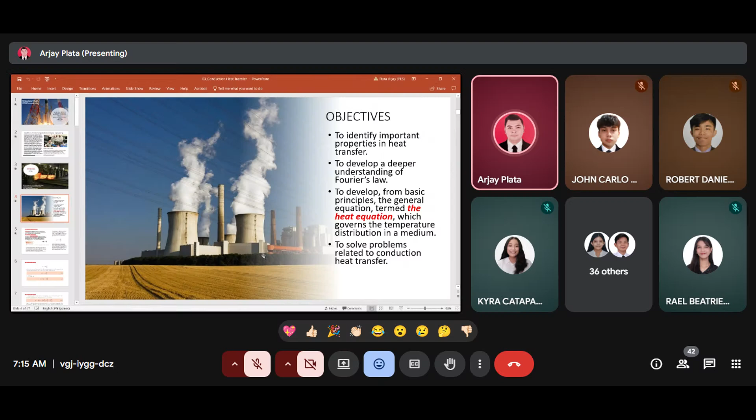So our objective yesterday was first to identify important properties in heat transfer, develop a deeper understanding of Fourier's law, to develop from the basic principles the general equation termed as the heat diffusion equation, which governs the temperature distribution in a medium, and to solve problems related to conduction heat transfer.

So today we will continue our discussion with solving problems related to conduction heat transfer. So this will be our goal for today.

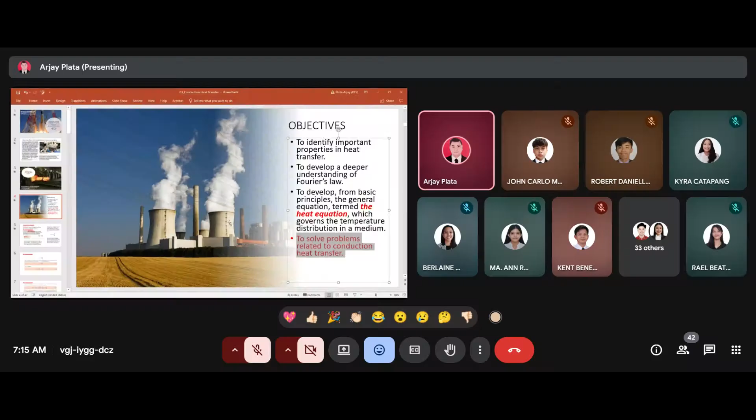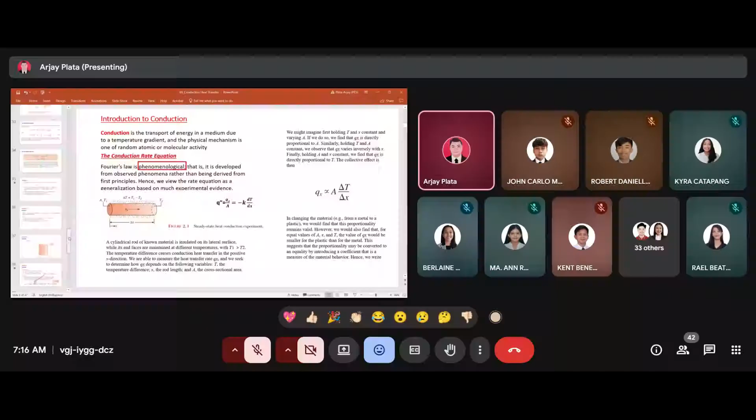So we have discussed the introduction to conduction. The heat diffusion equation was also derived yesterday, so we already know how to derive the heat diffusion equation. This is for Cartesian coordinates.

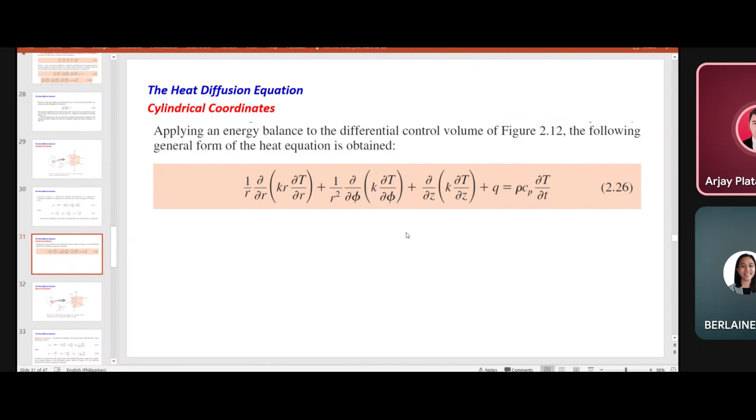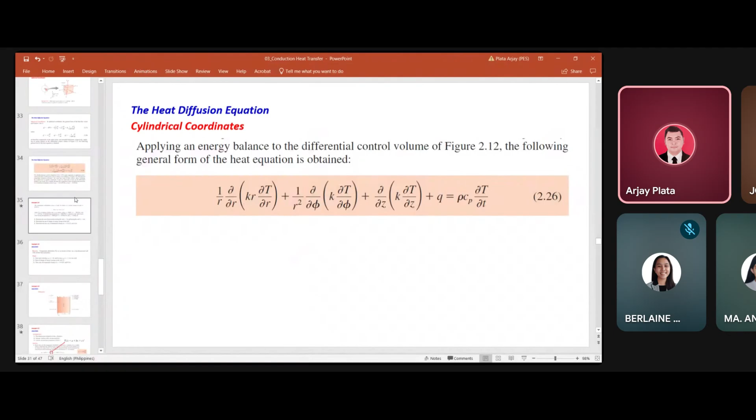For cylindrical coordinates, we have a separate equation similar to equation 2.19 but with different coordinates. So just by applying the energy balance to the differential control volume, we can form the general equation, the heat diffusion equation. And also we have the one for spherical coordinates.

So now you will solve sample problems. Do you have, before we proceed, any question regarding the derivation for the heat diffusion equation?

So for information, we are deriving the heat diffusion equation because the major objective in the conduction analysis is to determine the temperature field in a medium resulting from conditions imposed on its boundaries. So that is the temperature distribution.

So we calculate this so that we can know how to distribute the temperature across a certain system. So the temperature distribution represents how the temperature varies from position in the medium.

So after that, the conduction heat flux at any point in the medium or on its surface may be computed from Fourier's law. So yesterday, we just applied the methodology for energy conservation requirements. So we have identified that energy coming in plus energy generated minus energy coming out is equivalent to energy stored in the system.

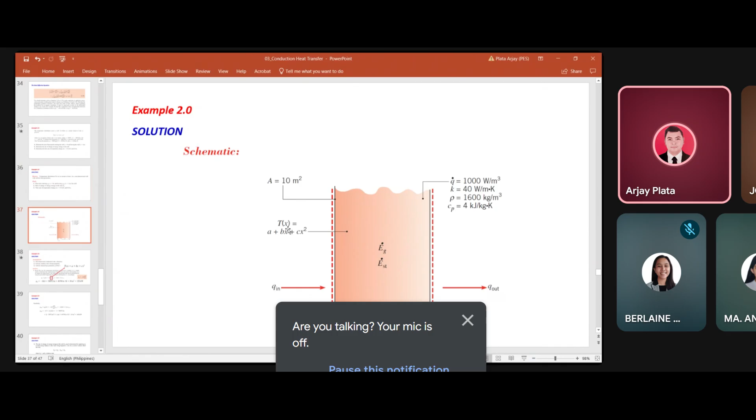Again, ang hinahanap natin ay heat rates entering at Q in at x equals 0. So, yung heat rate, itong Q in at saka Q out, yun yung hinahanap natin given yung equation. So, paano siya isosolve? At saka another hinahanap pa is rate of change yung energy stored. Ito hinahanap energy stored, tsaka time rate of temperature change at x equals 0, 0.25, and 0.5 meters. So yun, yung T yung hinahanap na next. So meron tayong equation. So substitute lang natin yung value ng x dito sa inyo. So naintindihan ba yung problem?

Assumptions natin is always one-dimensional conduction in x direction. So we can add also isotropic medium with constant properties and uniform heat generation Q watt per meter cube, Q dot in watt per meter cube. So uniform yung internal heat generation.

Analysis, recall that once the temperature distribution is known for a medium, it is simple matter to determine the conduction heat transfer rate at any point in the medium or at its surface by using the Fourier's law. Hence, the desired heat rates may be determined by using the prescribed temperature distribution with equation 2.1 accordingly. So, Q in. Okay, so ang hinahanap natin una ay heat rates entering Q or Q in at x equals 0 and leaving at Q out at x equals 1 meter.

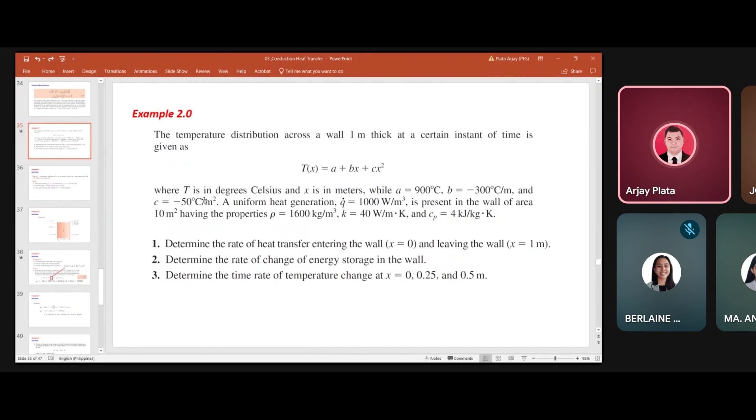So, yun, negative kA, B plus 2Cx at x equals L. So, negative of B plus 2CL, L instead of x, gagawin natin L, times kA. So, equals negative of negative 300 degrees Celsius per meter plus 2 times yung value ng C is negative 50. Given siya sa problem. Ito, negative 50 degrees Celsius per meter squared.

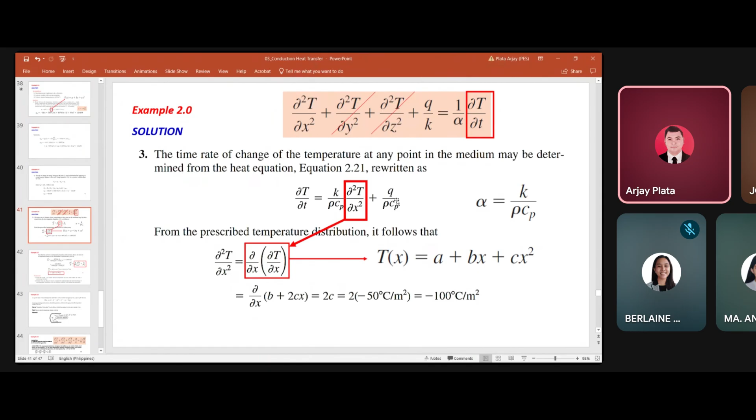So ito pala yung Q generated, Q dot, hindi ko lang nalagyan ng dot. Pero Q dot siya, which is 1,000 watt per cubic meter—ito Q dot to, heat generated. So parehas ang density and Cp, Q over rho Cp, equals negative 6.25 times 10 to the negative 4 degrees Celsius per second plus 1.56 times 10 to the negative 4 degrees Celsius per second. So ito yung magiging time rate of temperature change, na partial derivative of T with respect to time. Ibig sabihin, nagbabago ang temperature at a rate of negative 4.69 times 10 to the negative 4 degrees Celsius per second. Kada 1 second, nagbabago ang temperature ng negative 4.69 times 10 to the negative 4.

From this result, it is evident that the temperature at every point within the wall is decreasing with time. So nagde-decrease yung temperature at every point within the wall. Fourier's law can always be used to compute the conduction heat rate from knowledge of the temperature distribution, even for unsteady conditions with internal heat generation. So applicable pa rin yung Fourier's law sa pag-compute ng conduction heat transfer gamit ang ating knowledge of temperature distribution, kahit meron siyang heat generation. Kaya pala siya unsteady.

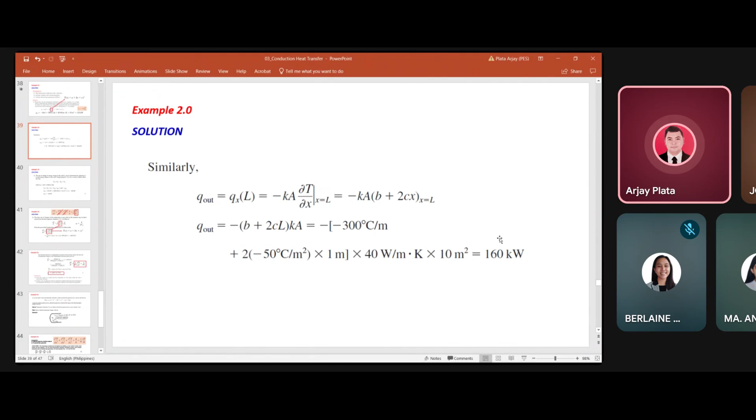Kaya kung mapapansin nyo kanina, yung Qin natin is 120, pero yung naging Q out natin is 160. Ibig sabihin tumaas yung heat transfer na lumabas. Bakit? Paano nangyari na tumaas from 120 naging 160? It is because meron tayong heat generated doon sa system. Pwedeng sa loob ng wall, merong source ng heat, kaya tumaas yung value ng ating heat transfer coming out. Kaya hindi na siya steady state, unsteady state na siya or transient.

May question kayo? Nagets kung paano na-solve yung partial derivative of temperature with respect to time.

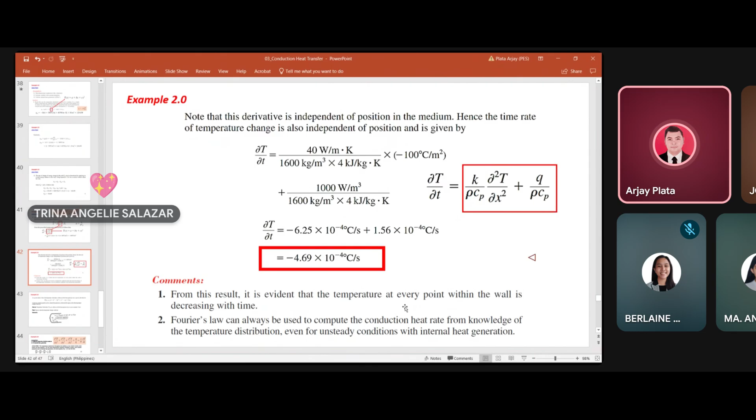Okay, so next example. I will give you 5 minutes to solve this problem.

So, at a given instant of time, the temperature distribution within an infinite homogeneous body is given by the function T of x, y, and z, which is x squared minus 2y squared plus z squared minus xy plus 2yz. I will repeat: at a given instant of time, the temperature distribution within an infinite homogeneous body is given by the function T of x, y, and z. Three-dimensional siya, may x, y, at saka z tayo. So equal siya sa equation na to, x squared minus 2y squared plus z squared minus xy plus 2yz. Assuming constant properties and walang internal heat generation.

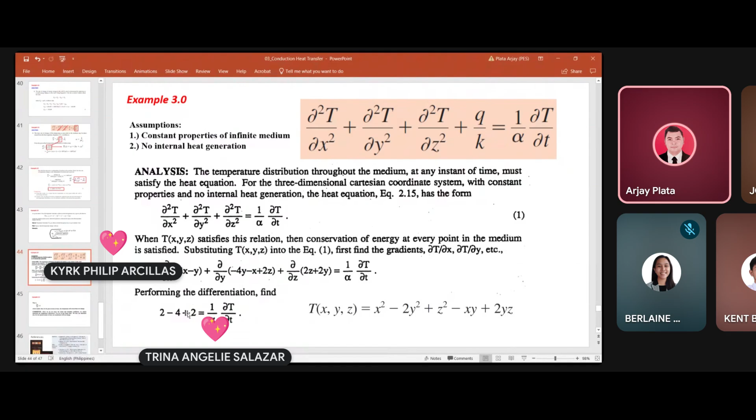So performing the differentiation, magiging ganito na equation natin: 2 minus 4 plus 2. Nagets nyo kung paano na nakuha yung 2 minus 4 plus 2? Kinuha lang yung derivative nito, yung 2x minus y, negative 4y minus x plus 2z, at yung 2z plus 2y. So ang magiging sagot dito is 2 minus 4 is negative 2 plus 2 is 0.

So partial derivative of t with respect to time is equal to 0, which implies that for the given instant of time, the temperature everywhere will not change. Since we do not know the initial and boundary conditions, we cannot determine the temperature distribution at any future time. We can only determine that for this special instant of time the temperature will not change. Wala tayong initial boundary condition, kaya hindi natin ma-determine ang temperature distribution. Ibig sabihin nito, kapag mayroon kayong value na partial derivative of temperature with respect to time, hindi nagbabago yung temperature niya.

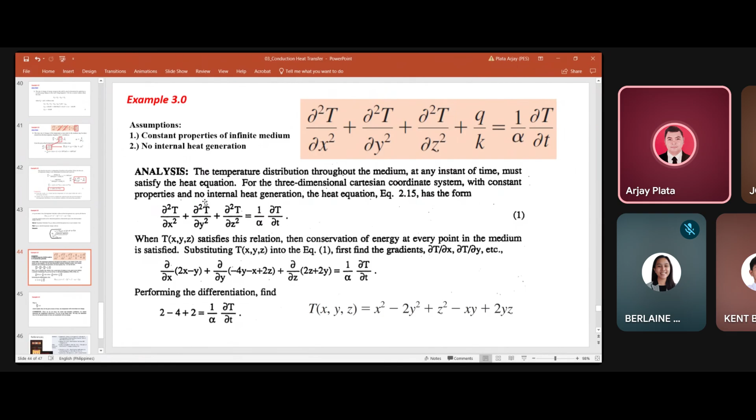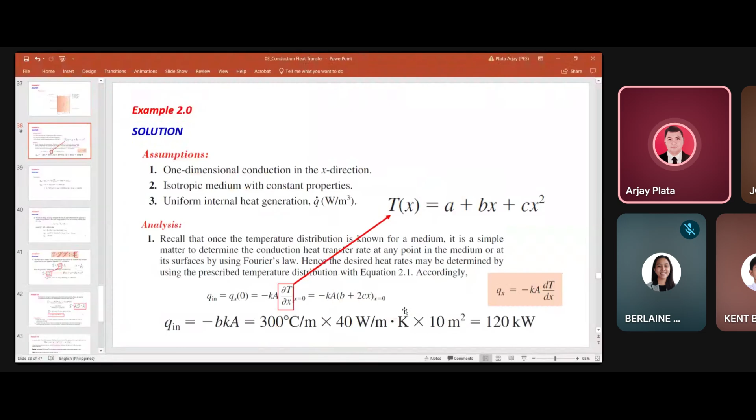So, walang time rate of change. Tsaka wala kang given na initial boundary condition. Dito sa unang problem, given yung distance. Dito sa ikalawang problem, walang given na distance, wala siyang boundary condition na binigay. Kaya 0 yung nakuha natin.

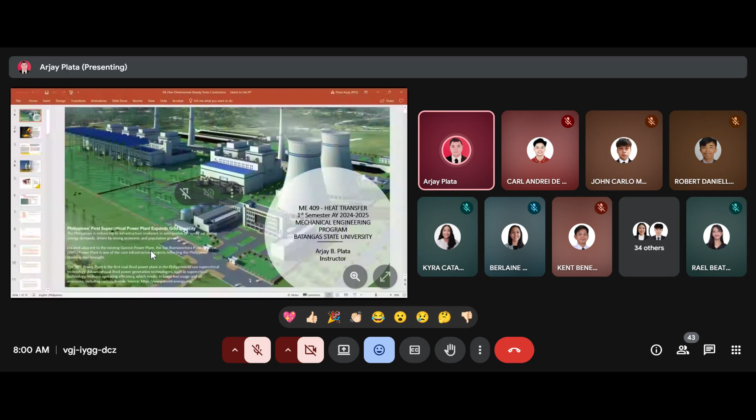So this, as you can see on our screen, meron tayong Philippines' first supercritical power plant expands grid capacity. Another common application ng heat transfer ay sa mga power plants. Itong Philippines' first supercritical power plant expands capacity ay nasa Quezon, katabi lang ng Quezon Power Plant. Located adjacent to the existing Quezon Power Plant, the San Buenaventura Power Ltd. Company power plant is one of the core infrastructure projects reflecting the Philippines' planning and foresight. SBPL Power Plant is the first coal-fired power plant in the Philippines to use supercritical technology. Advanced coal-fired power generation technology such as supercritical technology increases operating efficiency which results in reduced fuel usage and air emissions including carbon dioxide. So maraming heat transfer equipment ang required para makapagtayo ng advanced coal-fired power generation.

Pero ngayon, sa ibang part, since meron tayong Paris Treaty Agreement, mas pinopromote yung decarbonization, as you may have heard. So usually yung mga power plants, nagtatayo sila ng adjacent na carbon capture facility. Yung mismong carbon capture facility, mangangailangan pa rin siya ng maraming heat transfer equipment.

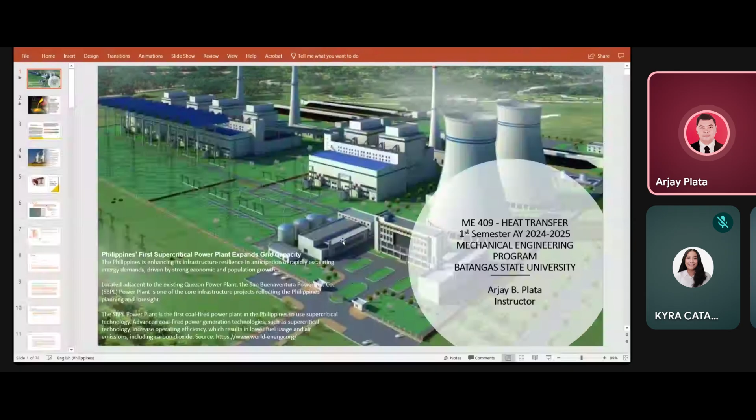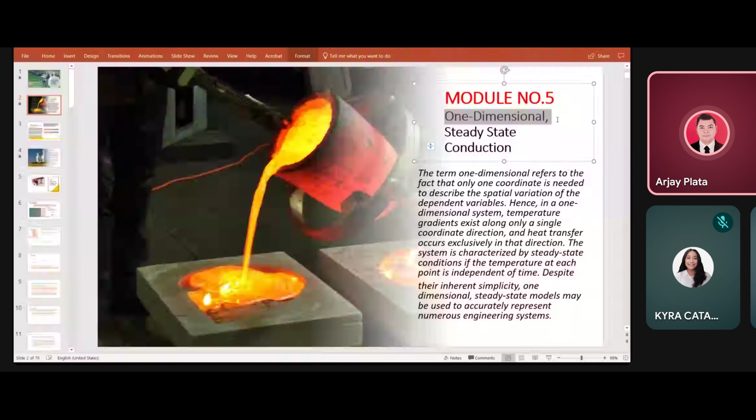So just a trivia. Our next topic is one-dimensional steady-state conduction. One-dimensional, meaning x direction lang yung focus natin. The term one-dimensional refers to the fact that only one coordinate is needed to describe the spatial variation of the dependent variables. Hence, in a one-dimensional system, temperature gradients exist along a single coordinate direction and heat transfer occurs exclusively in that direction. The system is characterized by steady-state conditions, if the temperature at each point is independent of time. Despite their inherent simplicity, one-dimensional steady-state models may be used to accurately represent numerous engineering systems.

Okay, so as you can see here, very hot metal, molten metal is being poured into a concrete.

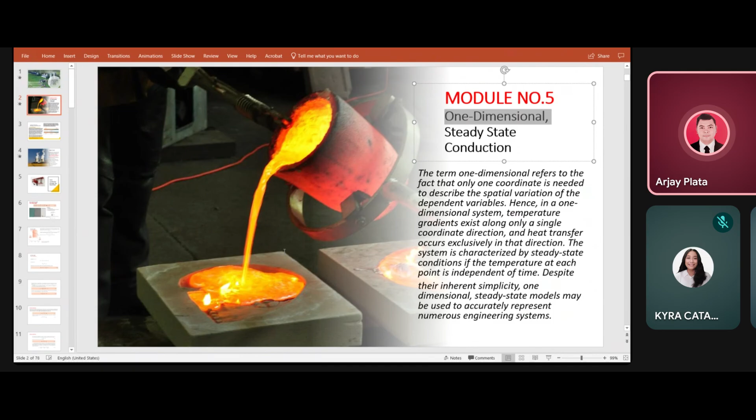Okay, so our objectives in this module is first to determine the expressions for the temperature distribution and heat transfer rate in common planar, cylindrical, and spherical geometries. To introduce the concept of thermal resistance. To apply heat transfer and thermal resistance concepts in problem solving. And to solve problems in conduction heat transfer with convection film coefficient.

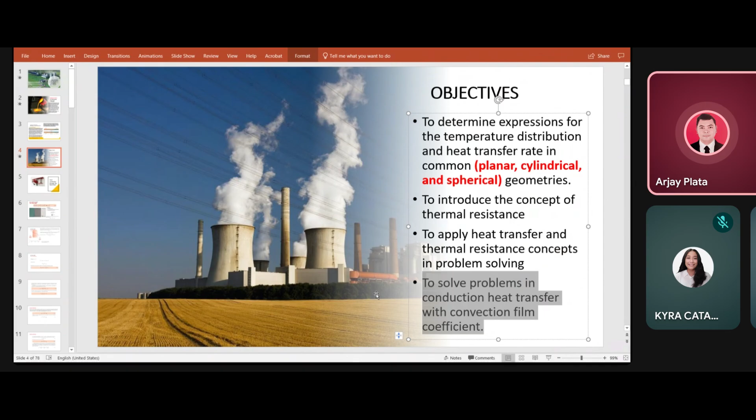So first is heat conduction on the plane wall. Yeah, for example, let's apply the heat diffusion equation.

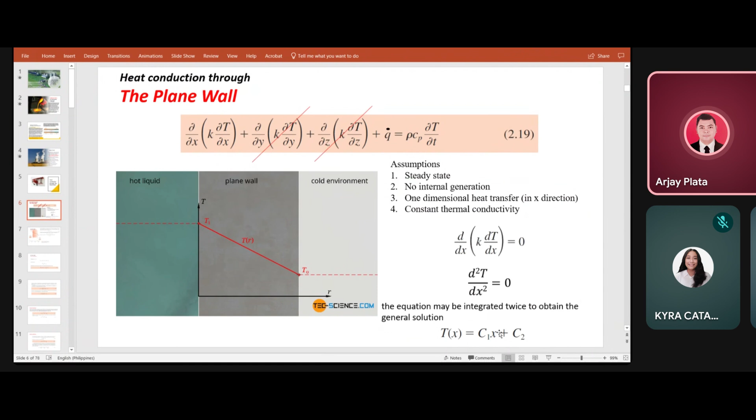So, ito ay sinubstitute lang natin yung value ng x. Di ba meron tayo kanina equation na C1x plus C2. So kapag C1x, ang x ay 0, edi C2 na lang siya. So kapag naman x equals L, magkakaroon siya ng value na C1 times L plus C2, plus C1L plus TS1. So yung TS1 natin kanina is C2. So makuha niyo yung value ng C1 equals TS2 minus TS1 over L.

Anyway, ito naman ay derivation lang. In-apply lang natin yung condition sa general solution. So it follows that this one.

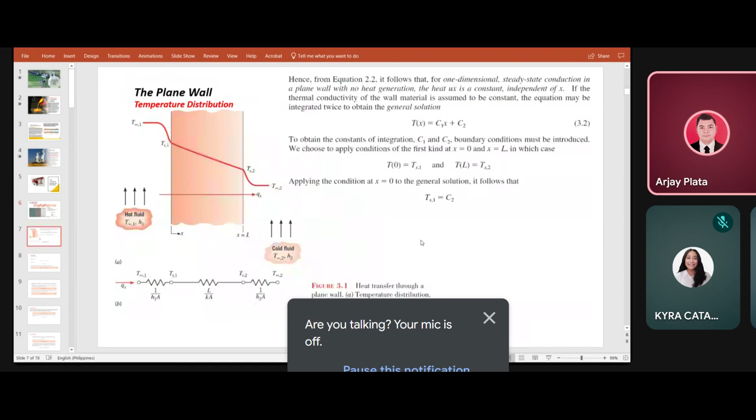So temperature distribution ng equation na to. So T of x equals Ts2 minus Ts1 times x over L plus Ts1.

So but we will focus more on application na ng Fourier's law. Ang formula natin ng Fourier's law sa conduction is negative Ka dt over dx, equals sa negative Ka over L, Ts1 minus Ts2. So itong equation na to, yung Ts1 minus Ts2 or delta T over L, dito siya galing.

Kaya nagkaroon tayo ng ganitong equation na Ka over L, Ts1 minus Ts2. Kinuha lang natin yung general solution sa temperature distribution. Itong T of x natin is delta T x over L plus Ts1. Ginamit lang natin siya dito. Mga derivation lang itong equations na ito para mag-arrive tayo sa equation ng conduction.

Which is Q, yun nga, na Fourier's law, which is Qx over A equals K over L, K delta T over L. Sa madaling salita, K delta T over L. So kapag heat flux, i-divide nyo lang ng area, yung ating heat rate.

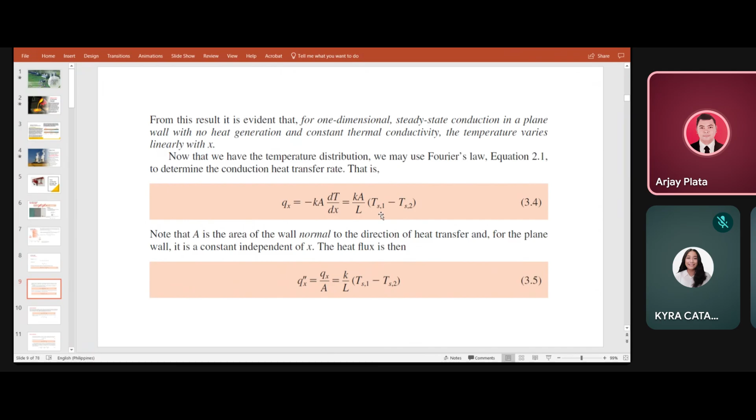Okay, so same sa electrical resistance, yung thermal resistance natin, parang ganun din yung concept. Pero dito, instead na electrical, so conduction ng heat yung kinoconsider natin.

So kung titingnan nyo, di ba, ang formula natin ng Q equals Ka delta T over L. Tama. Ka delta T over L. So i-rearrange lang ito, yun yung formula ng ating heat transfer. Q equals Ka times delta T all over L.

So yung thermal resistance natin is equivalent to change in temperature over Qx, equivalent siya sa L over Ka. Yun yung ating thermal conductivity, thermal resistance for conduction. Ang formula niya is delta T over Q, which is equivalent to L over Ka din. Kaya may L over Ka tayo dito kanina for conduction. So yun lang namin tatandaan nyo ng L over Ka, yung thermal resistance ng conduction.

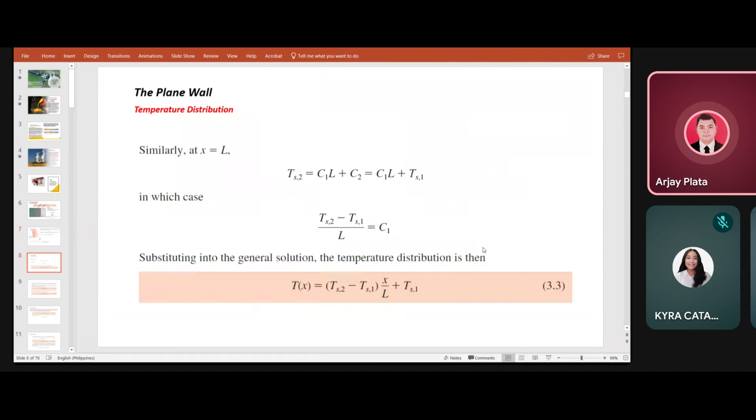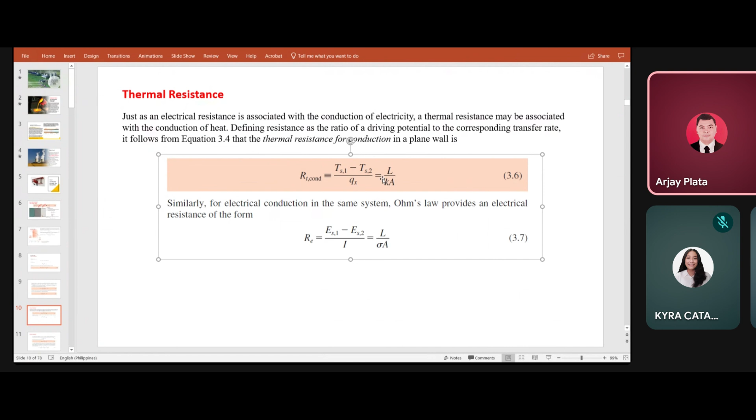So for convection naman, galing siya sa Newton's law of cooling. So we have HA delta T, yung heat rate natin. Kukunin natin yung thermal resistance. Same dito, delta T over Q. Kunin natin yung delta T over Q, equivalent siya sa 1 over HA.

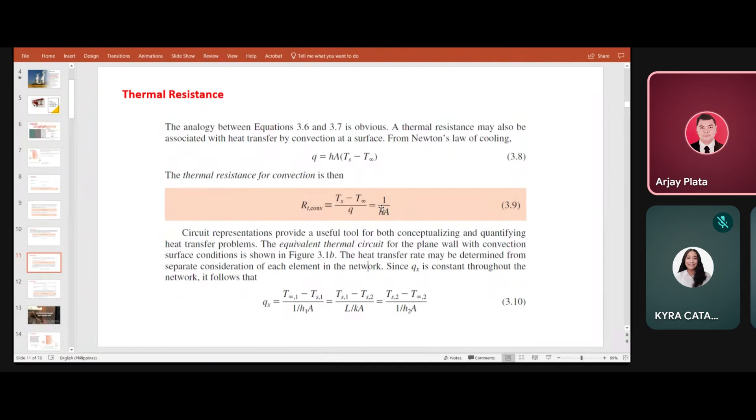Okay? Nagets? Kung paano nakuha yung L over KA at saka 1 over HA. Yan, so yun yung ating thermal resistance. So kung kukunin nyo yung total resistance dito, kailangan nyo siyang i-add: 1 over H1A plus L over KA plus 1 over H2A.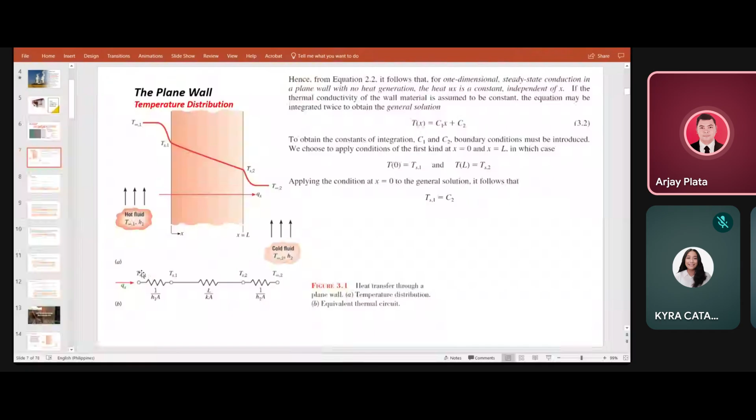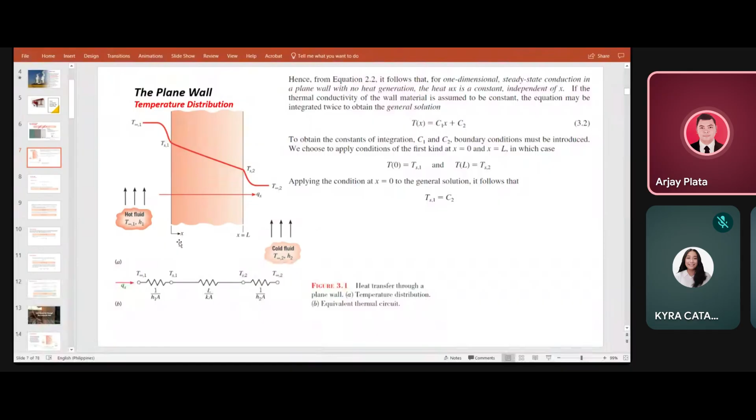So yan, pag nakuha nyo yung total resistance, tapos given ang delta T, bali, ang delta T na gagamitin nyo is kung ano yung nasa dalawang dulo. Kapag meron kayong total thermal resistance, tapos may dalawa kayong delta T, yung sa convection sa dulo, tapos convection sa dulo, nakukuha nyo na yung rate ng heat transfer kasi ang formula ng heat transfer rate ay delta T over R total. Yung R total is yung total ng tatlong resistances. Tapos yung delta T is yun sa dalawang dulo.

Okay? Pag radiation pala, 1 over HRA ang gagamitin. Parang ano lang din, parang Newton's law of cooling. Sa convection, 1 over HA. Sa radiation, 1 over HRA.

Any question sa thermal resistance?

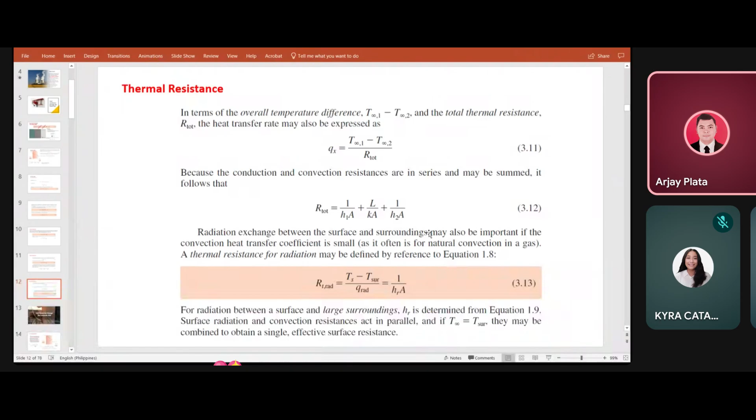So paano pag magkakaibang material? Tinatawag natin na composite wall. Heat conduction through composite wall. Pag sinabing composite wall, they are number of layers of different materials with different properties and thicknesses.

Ang formula ng heat transfer ay delta T over summation ng R total. Ang delta T na gagamitin nyo is yung pinakauna, T infinity 1, temperature ng hot fluid, minus temperature ng cold fluid. So dulo-dulo ang gagamitin na equation, pero pwede naman hindi dulo-dulo yung gamitin.

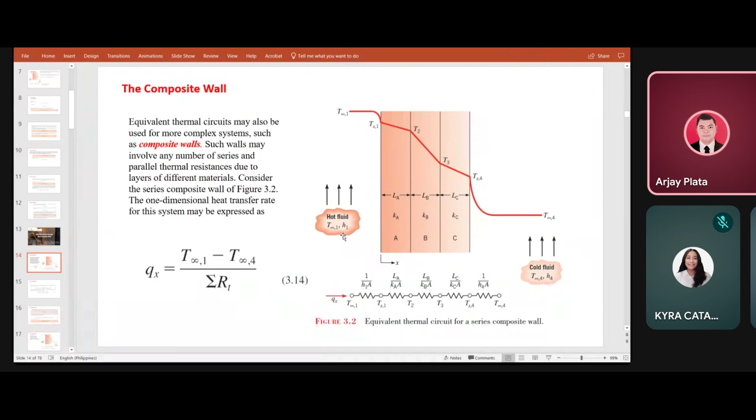Kung kukunin nyo yung sabi ko na Qx equals temperature ng hot fluid minus temperature ng cold fluid, all over yung total resistances na 5. Yung 5 total resistance, equivalent lang yan.